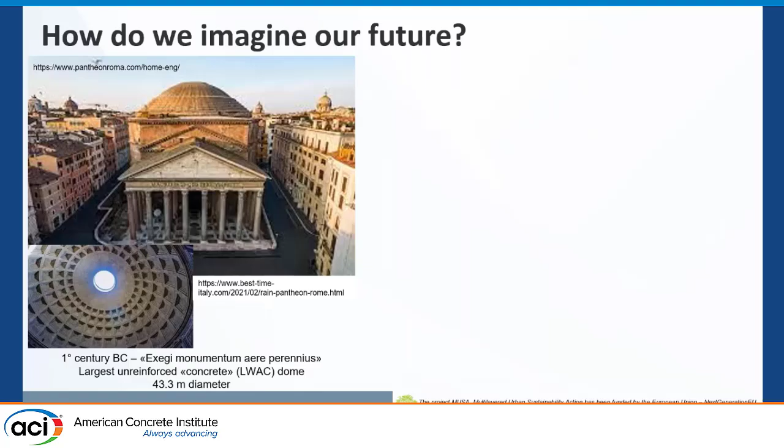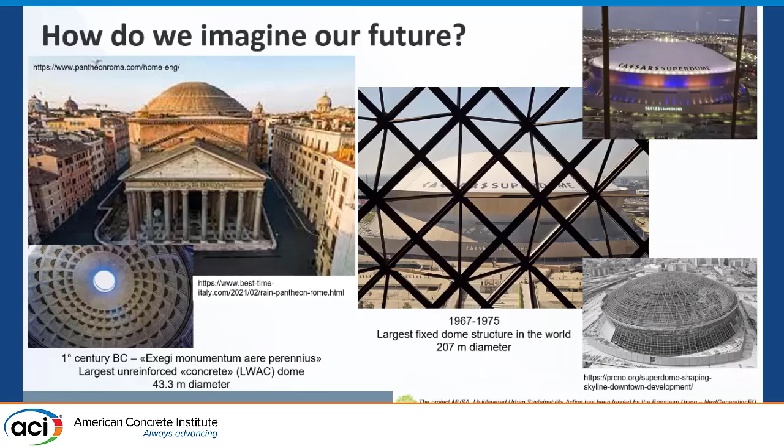And when I checked in at the hotel and found a way to my room, which was not easy, I have to say, I ended up in this other dome. This is about 1900 years later than that, and still is the largest fixed dome structure in the world. But the principles of the structural mechanics are exactly the same. The Romans probably had a hint of how a dome worked as a mainly compressed structure. They removed this part here, having the knowledge of the circumferential behavior of the dome. But the principles are exactly the same.

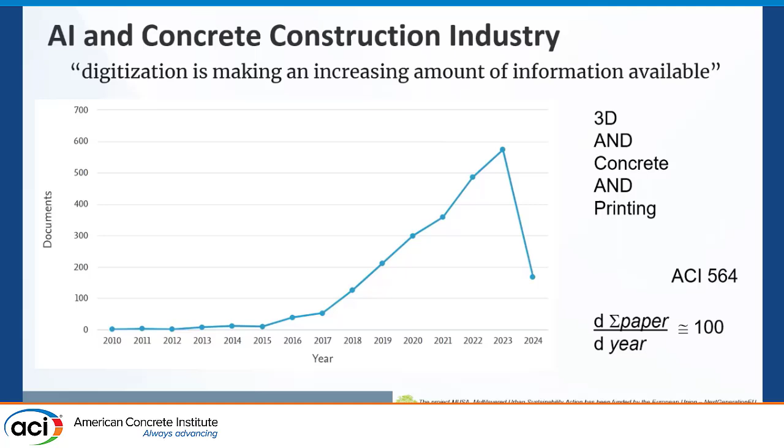But what does this mean? This means that for consolidated or innovative technologies, there are a number of papers published per year. You can imagine there has been somebody doing research, writing, there have been reviewers going back and forth, associate editors. So this means a lot of work for the community. But there is a lot of information which is spread out. So the issue is, how can we transform this information into knowledge? Can artificial intelligence help us?

Well, I am a man of a certain age, but I remember when I was a student, we still had paper journals. We had to subscribe. And there was a service in the department for which you registered for the journals. You had them for 2 days, you looked at them, made copies, and then read the papers. Nowadays, we can have this information immediately with a click.

I recommend the reading of this book, The Age of Artificial Intelligence. One of the authors is Henry Kissinger, and there are two other academics. I've read it, I found it very interesting. And there is this sentence which hit me. The internet inundates users with opinions of thousands, even millions of other users. But we no longer have the time for sustained reflection, which is what transforms information into knowledge. We do not have the space and the time required for deep, concentrated thought. So, is artificial intelligence going to replace this space and time which is now lacking?

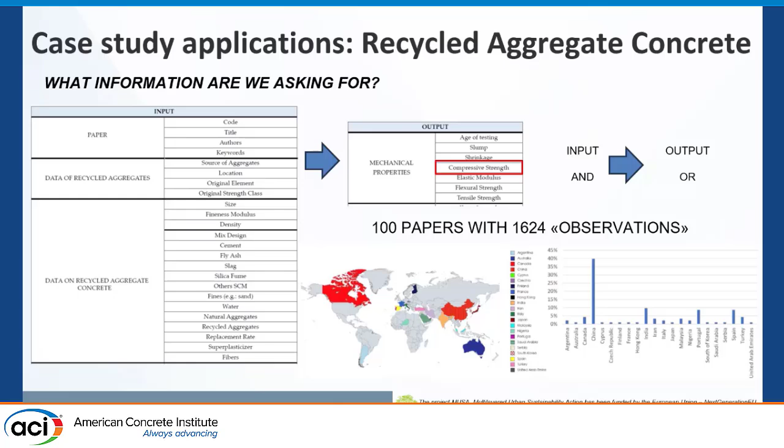So in the end, you see, we ended up selecting 100 papers with 1,600 more pieces of information. Many of them came from China, but there was also a good geographical distribution. And we looked into compressive strength, the easiest thing that everybody will do. We trained our neural network, but we ended up with a very large error. 25 megapascal plus and minus, totally unacceptable.

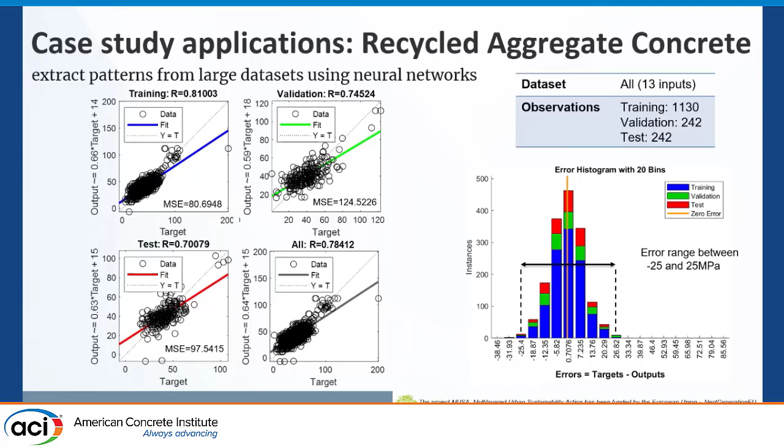So in the end, that is what, extract patterns from large data sets, but then there was time for a sustained reflection. The student came to me and said, well, I have these results. Then you have to sit down and look into that. Sustained reflection. And I asked her, look at the frequency of your data in mix designs.

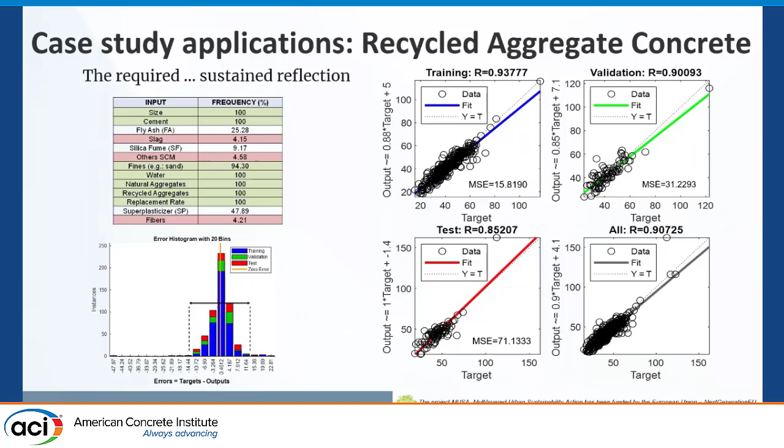So we realized that there were very few papers which had slag or other supplementary cementitious materials different from fly ash, or had fibers. These very low frequency papers actually jeopardized the database. So simply said, let's try to remove them, and the error was greatly reduced because you see we went from 25 to 14, a little bit less. Then, okay, you can rely upon the removal of the outliers, and we ended up with an error which we deemed acceptable, which was below 7 megapascal.

But why did we deem that acceptable? That brings us back to the human tool. Because, for example, when you look at the structural design codes, there is the rule of thumb that to go from the average strength to the characteristic, you can subtract 8 megapascal. So that is some variability that we do accept in our current concrete technology production. So we deemed this prediction acceptable.

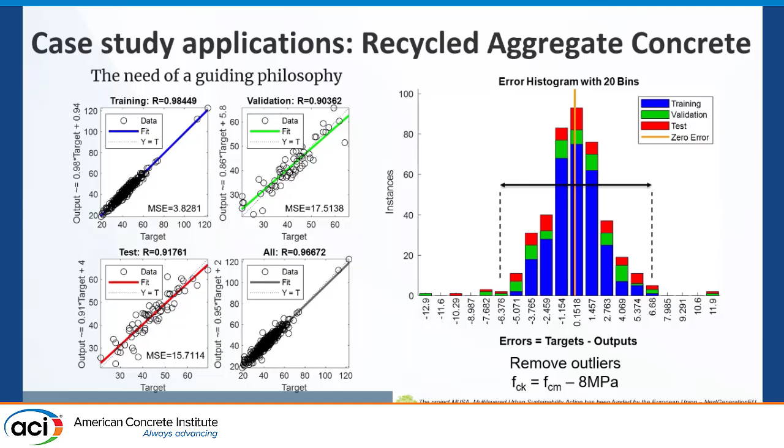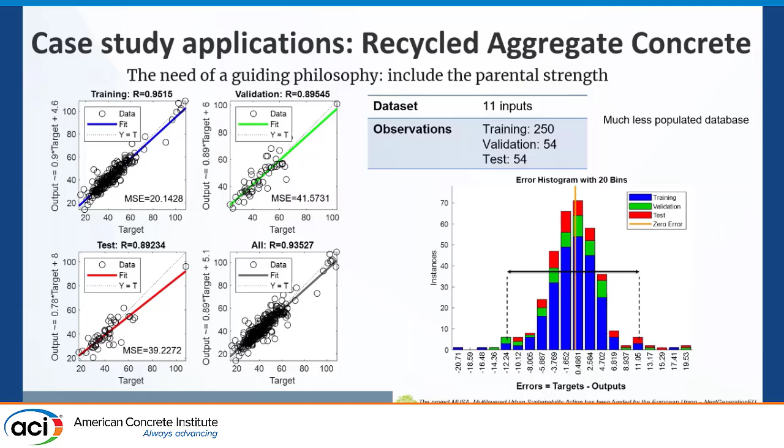And then we said, okay, let's include the parental strength information. Immediately, the error increased because this was information that was not present in all the papers. But this is important information if we want to spread this technology, if we want to set up a reliable value chain for recycled aggregates to be used in concrete and so on.

Well, after having said this, we wanted to validate our tool. And we went back to the original project, which led us to the idea of setting up this database. Actually, we had this project funded by the European Commission to set up a circular economy protocol or ideas for coal mine waste geomaterials.

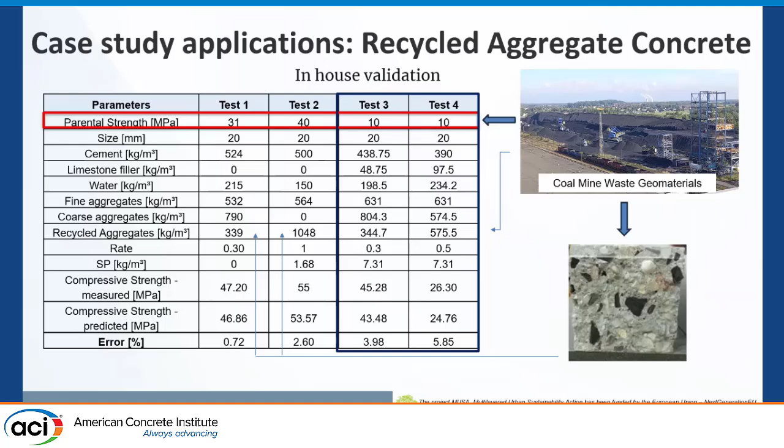Then we moved to another topic on which students have to read several papers per day to cope with the publication, 3D printing. We have these keywords, pumpability, extrudability, buildability, which are key for the successful application of 3D printed concrete. But hardly do you have something quantifiable. How do you quantify pumpability? It's a yes or no. I tried my mix, I pumped it, and it worked well. I tried my mix, I pumped it, and it clogged in the pump. That is what you have. Extrudability, I can extrude it in a continuous filament or I cannot.

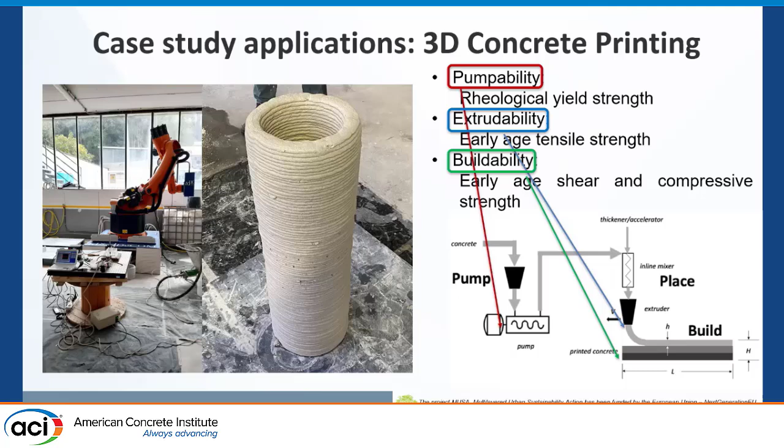Well, as a matter of fact, there are ways to correlate these requirements for 3D printability to fundamental properties of the material. The pumpability you can correlate to the Bingham yield strength. The extrudability you can correlate to the early age tensile strength because you are extruding a filament. So if the filament tears off, it means that you have exceeded its tensile strength. And buildability you correlate to early age compressive strength or Young modulus as well.

So also in this case, we had to decide which were the keywords we used to interrogate our database to extract the data. Okay, 3D and concrete and printing is the starting point. But then we wanted information on the mix design, which for 3D printing mixes is like an Arabian Phoenix. You don't find it in most cases because they are protected, patented, and so on. But we also wanted information on the rheological properties. So we asked yield stress or viscosity, and we ended up with 254 records.

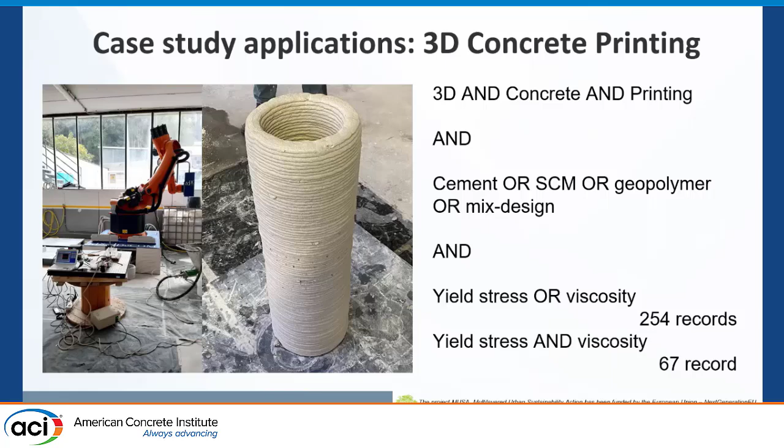If you ask yield stress and viscosity, which means that the study measured both properties, the number of records is greatly reduced. It's true that viscosity is not so important for printability. The yield stress governs more, but you can ask it as well. So we started building up our neural network. We started with 10 input neurons dealing with the data on the mix design, and we tried with 2 output neurons, the yield stress and the viscosity. Very poor prediction because we had very little data.

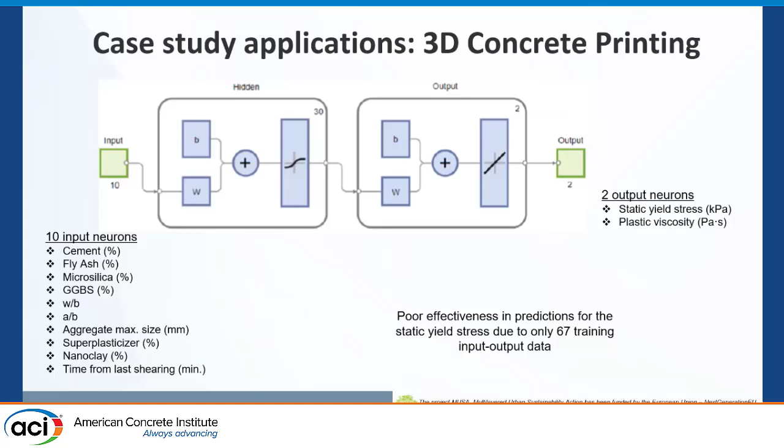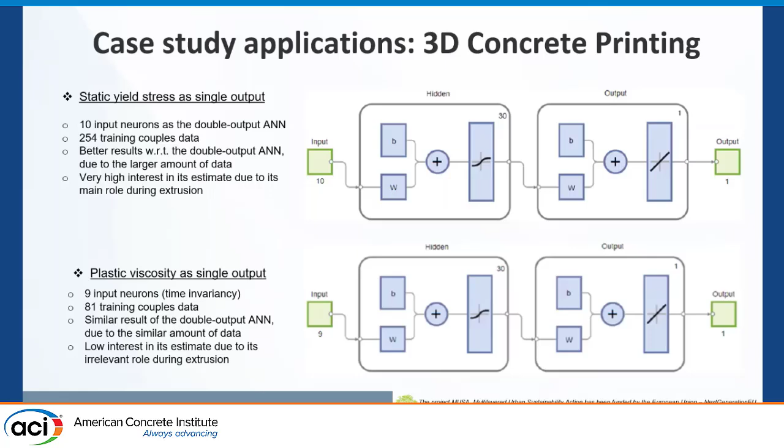So then we simply said, okay, let's try to split into 2 separate neural networks with the same input but each working on a different output. So one on yield stress and the other one on the plastic viscosity. And it worked well, and what we ended up with is what an engineer wants, a design card, because in the end he has to say, okay, I have a mix. I want to see whether it's printable, and if it's not printable, I want some tools which guide me to adjust the composition in order to achieve the printability.

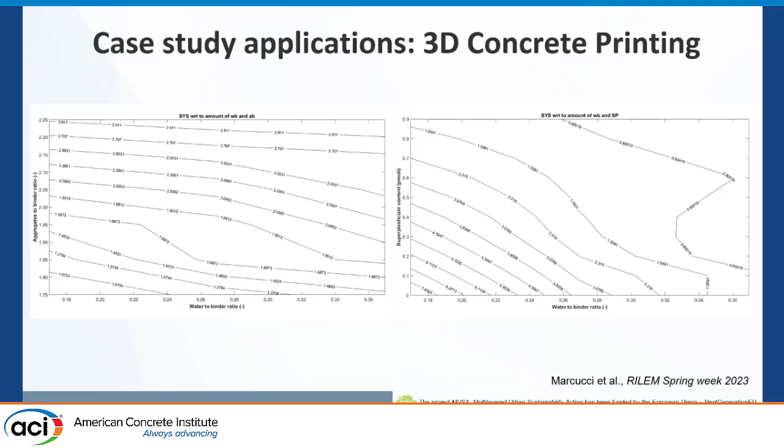So my student, Francesco, picked up randomly and said, I want to print some mixes. So we ended up with a paste, a mortar, and a mix containing geopolymers. We designed these mixes with the aid of the neural network. We had information from the neural network on the rheological properties, the yield stress, which was this. The neural network predicted these values on the second line.

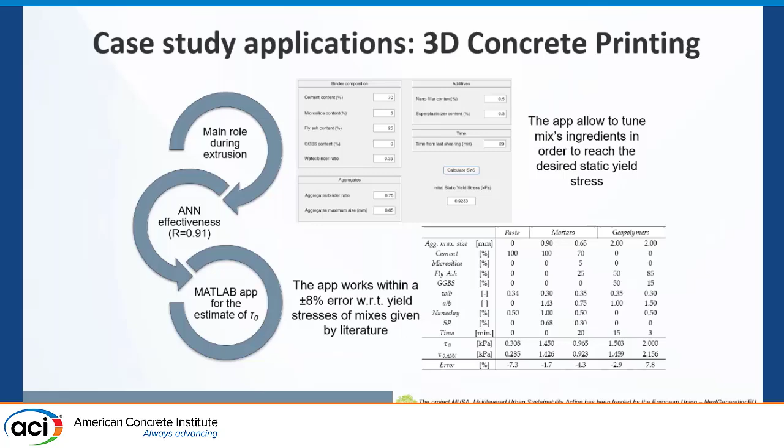We cast the mix, we printed it, we measured the property with a rheometer, and we ended up with predictions which had a maximum error of about 7%, which is acceptable, considering also the large variability of the information that you have.

Other application, self-healing concrete, quite a new technology. So we interrogated our database for the dosage of cement and mix design variables, and we had information on the crack width, age of healing, and the self-healing environment.

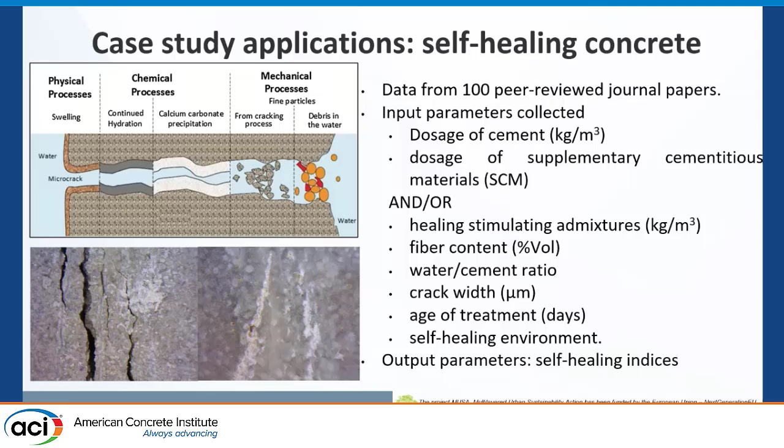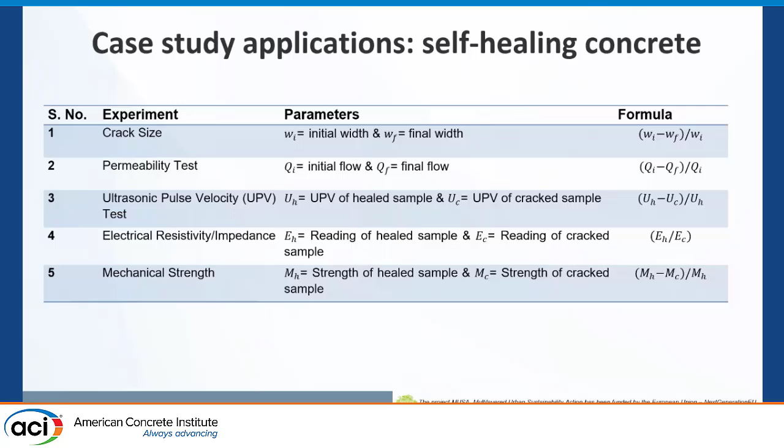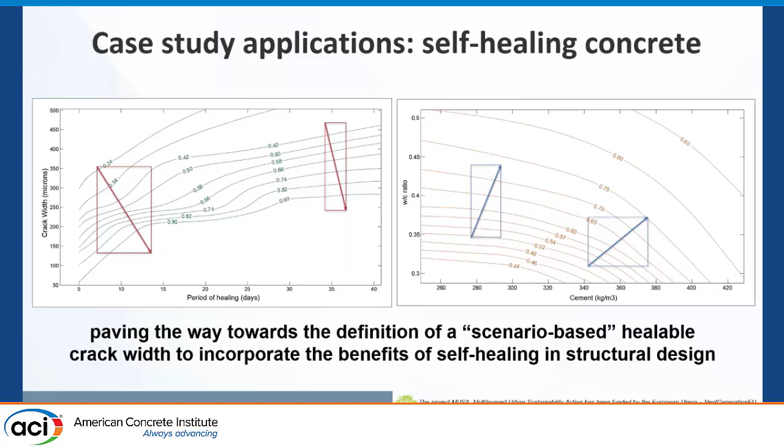Our output in this case were different parameters to quantify the effectiveness of the healing, so recovery in crack size, closure, in permeability, in ultrasonic pulse velocity, and so on. And also in this case, we ended up with design charts. In this case, our goal was: which is the maximum crack size that in a given condition I can heal? Because that is what an engineer will ask you. I tell you, okay, my concrete heals, and they say, okay, but which is the crack width that I can heal? So that is the information which we wanted to extract.

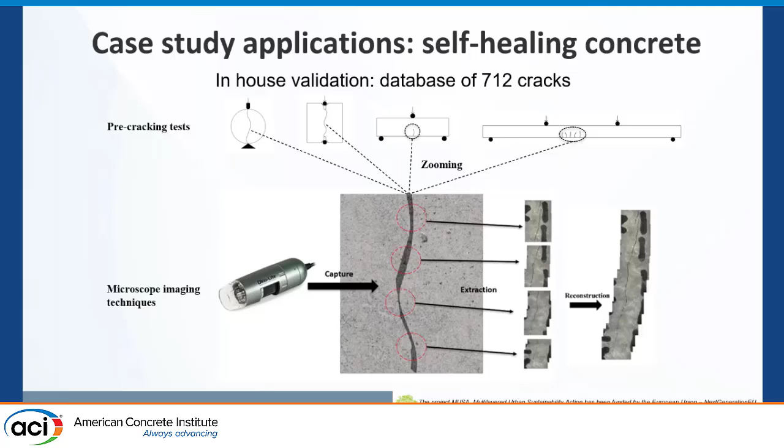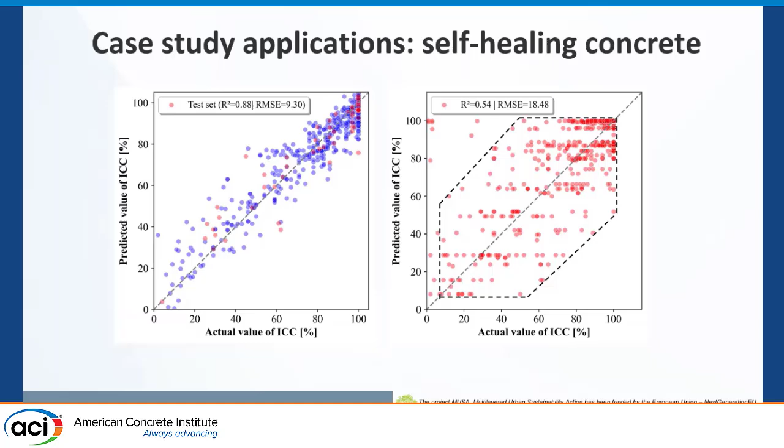And in the end, we also realized that since it's difficult to find a consistent database, we worked on this project, another European project, for 4 years. So we ended up with information about more than 700 cracks. We monitored all those cracks for up to 1 year. So we have about 3,000 images that constitute our database. We interpreted them with statistics, trying to calibrate a crack closure kinetic response. Then we used artificial intelligence, and in the end, we realized that if you use AI, what you get is a prediction which is much narrower than what you can get with statistics, because with statistics, you just end up with the best R-square. So summing up, conclusions.

Well, I will not say conclusions. Citing once more Kissinger, rather than clear outcomes, we more likely will use artificial intelligence and end up with a series of imperfect answers, but at least they are some answers. So this is the positive way to do that. So the thing is, anyway, this. Shall we continue to use AI only to manage large quantities of data simply because the amount exceeds our human capacity, so it helps us?

Or probably, shall we push the boundaries forward and explore, for example, domains which so far we have thought of deterministically? To measure the properties of a material, we make a test. And we interpret the results of a test through principles of continuum mechanics. Shall we probably reshuffle that and use artificial intelligence also to go beyond that? The other thing is that, created by humans, AI should be overseen by humans. The example is exactly these trials that we did.

We realized that if we want to consistently use AI in having tools which help us in concrete technology, for example, we must agree on a data ontology. We must agree on a minimum amount of information that we must have in each of our published research in order to make that research useful to extract information from those papers and transform that information into knowledge.